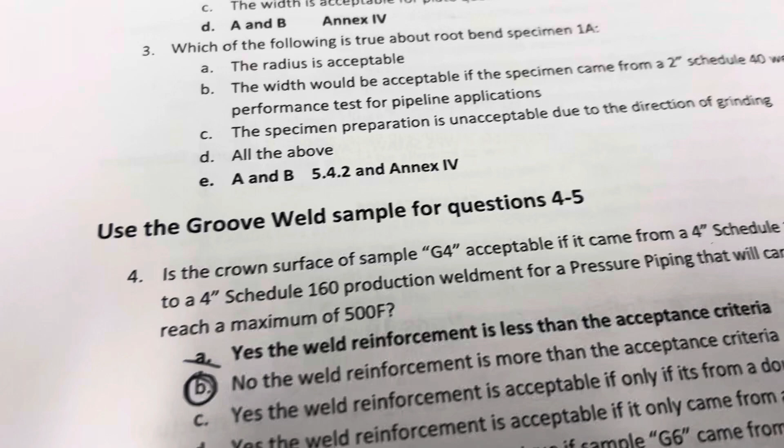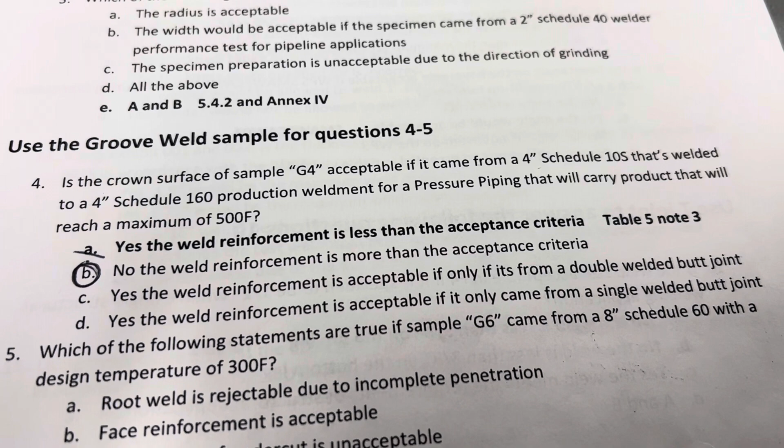Okay, we're gonna skip to number 4 because those are still in bend. 4 is groove weld. Is the crown surface of sample G4 acceptable if it came from a 4-inch Schedule 10S that's welded to a 4-inch Schedule 160 production weldment for a pressure piping that will carry product that will reach a maximum of 500 degrees Fahrenheit? So G4 groove, we know we're on this.

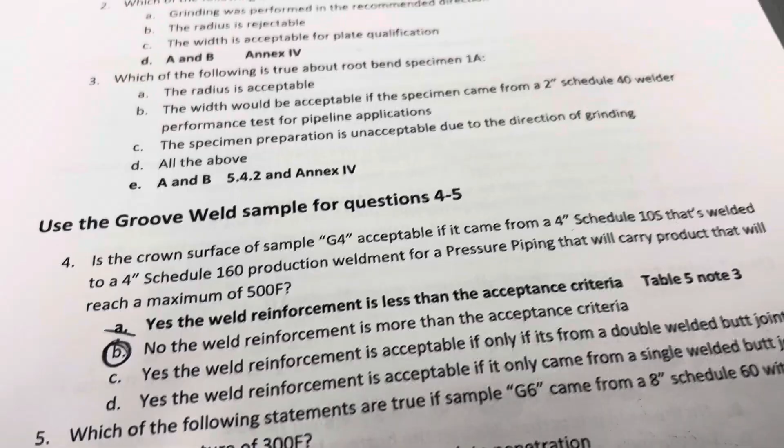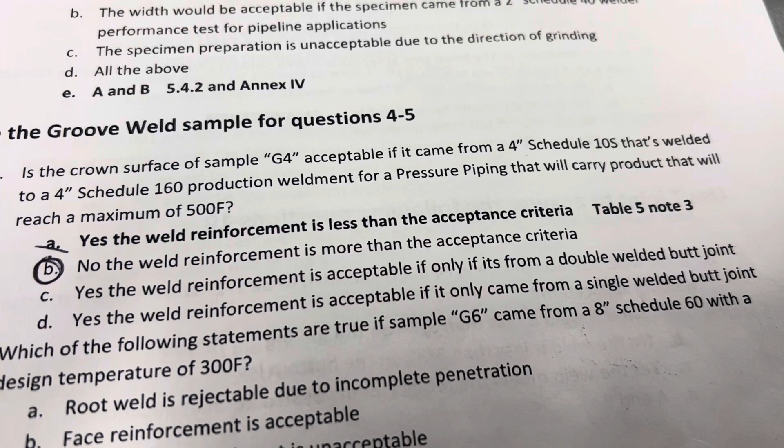Now let's look at our answers. Yes, the weld reinforcement is less than the acceptance criteria. No, the weld reinforcement is more than the acceptance criteria. Yes, the weld reinforcement is acceptable if it's from a double welded butt joint. Yes, the weld reinforcement is acceptable if it only came from a single welded butt joint.

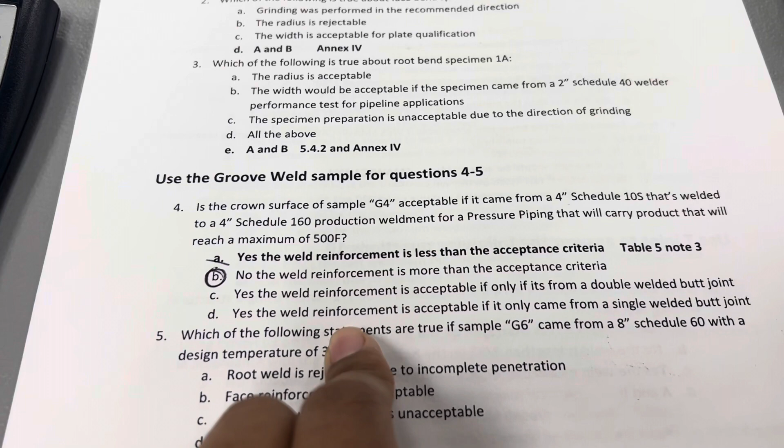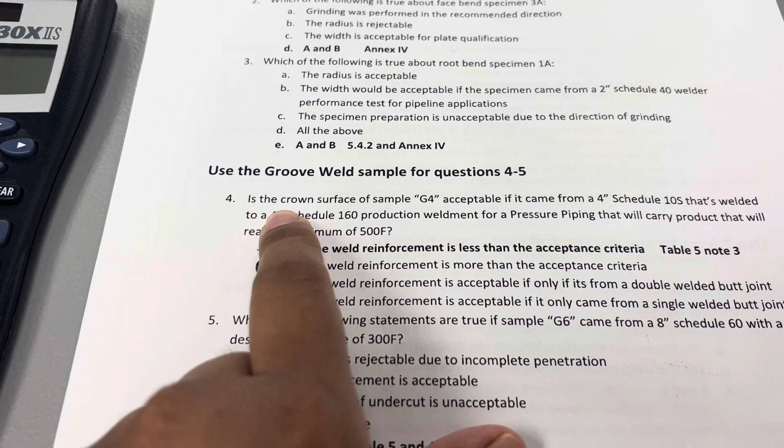So the answers are telling us we're going to look at weld reinforcement. Also the question, crown surface would indicate weld reinforcement. So it's also telling us we're going to go to pressure piping. Pressure piping is 4.0. Weld reinforcement is table 5. So we're in pressure piping, weld reinforcement. Okay, so it's telling us thickness of base metal.

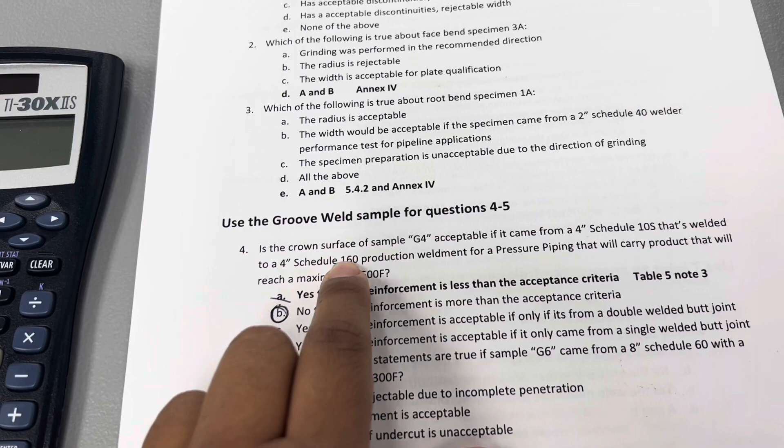Our question gives us 4-inch Schedule 10S, 4-inch Schedule 160. So that's diameter, because that's a pipe. That's the diameter of pipe. We need to know what the wall thickness is. So we know we have to go to pipe schedules. And you should know by now that that's on page 47.

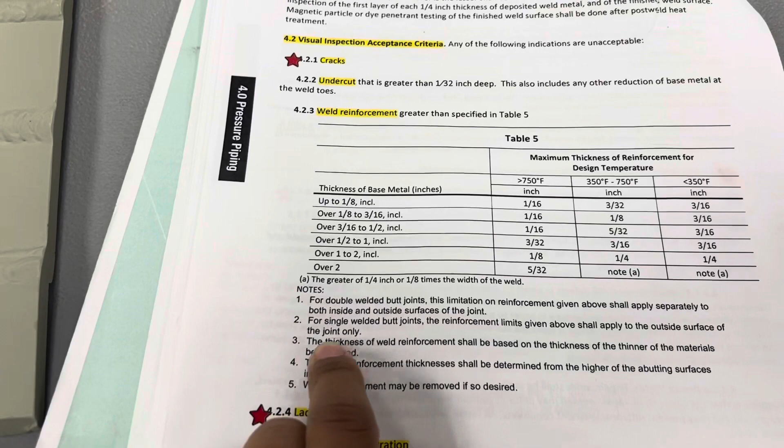4-inch Schedule 10 is 0.120, and there's 160. That's 0.530. But we should know that we don't even have to go to this one. We should just stop here because we need the smaller one. And that rule is stated on table 5. So when you're looking at table 5, the thickness of the weld reinforcement shall be based on the thickness of the thinner of the materials being joined.

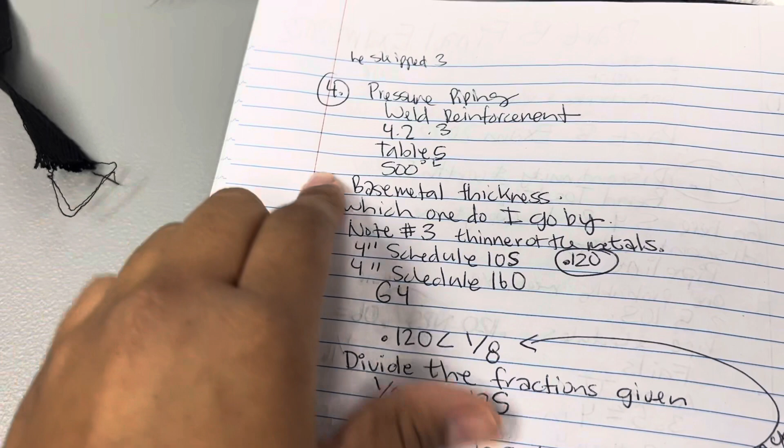So we went to pressure piping, weld reinforcement, table 5, base metal thickness. Which one do I go by? Note 3 says thinner of the metals. For these two, this one's the thinner one. That's why the 10 schedule is smaller, 0.120. So we're going to go back to table 5 because our question also gave us a degree.

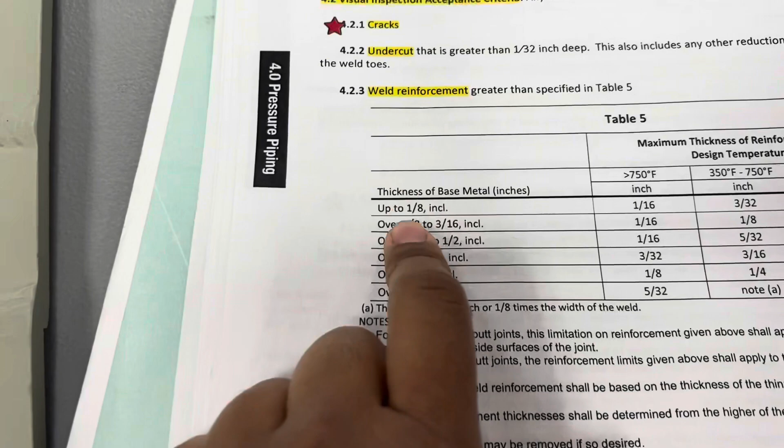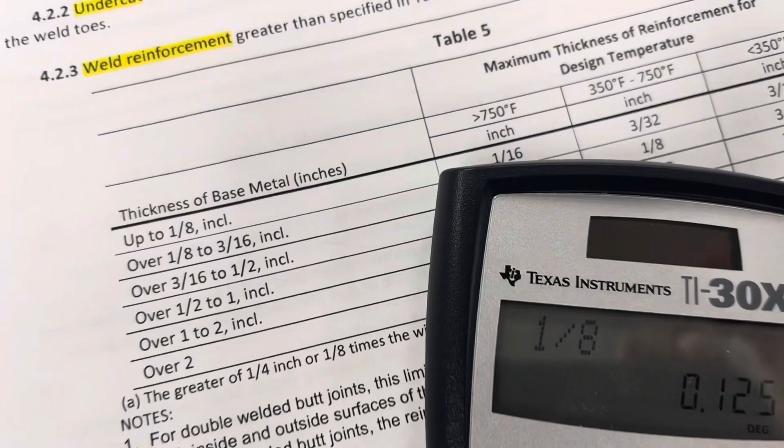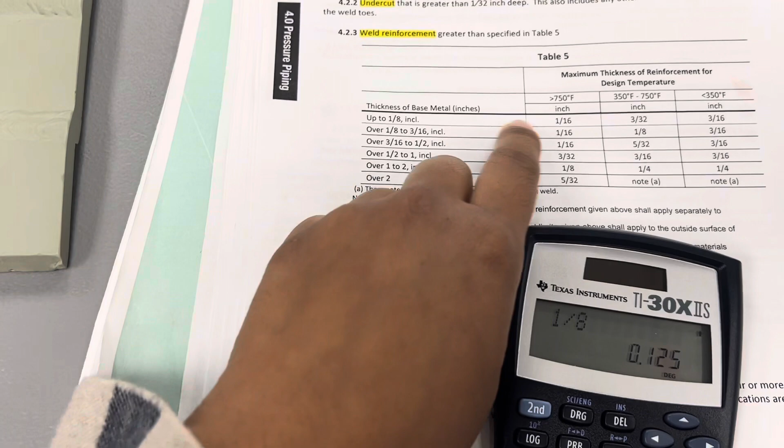So 0.120, where would it fall here? Let's do 1 divided by 8, right, if we don't know. 1 divided by 8 equals 0.125, and ours is 0.120, so we're right under 1/8. And the question gave us 500, so 3/32. So we're gonna get our V-WAC gauge, because for V-WAC we measure undercut, weld reinforcement.

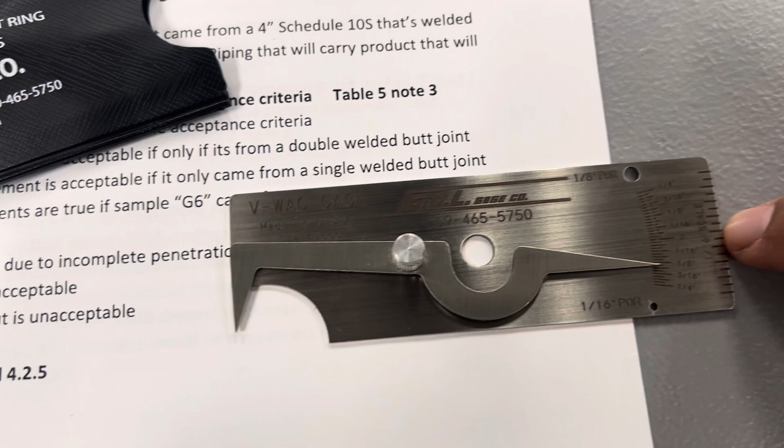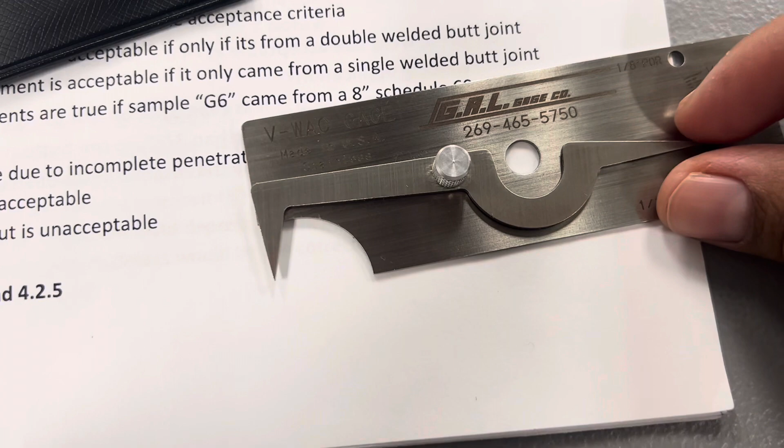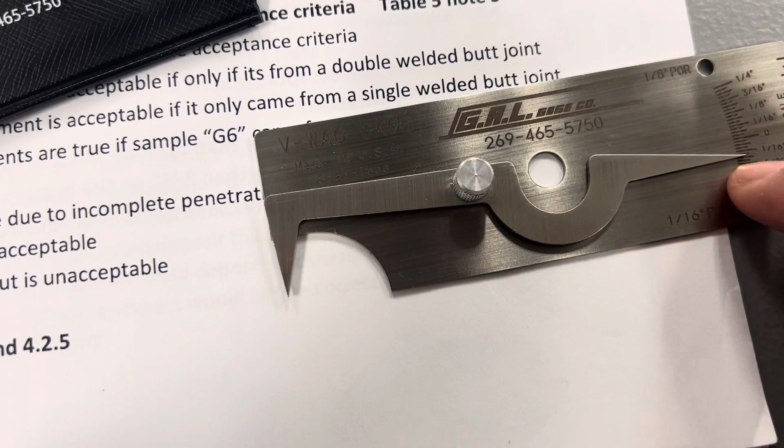Okay, 3/32. Let's see if I can do this. Weld reinforcement. So if I know this is the 0 line, 1, 2, 3. So we're going to be more or less across this little line, right up in there, because 1/8 is 4/32, so we're above 1/8. So 0, 1, 2, 3. Okay, so we're at 3/32 because this told us 3/32 is our maximum thickness reinforcement based off the size of the thinnest metal.

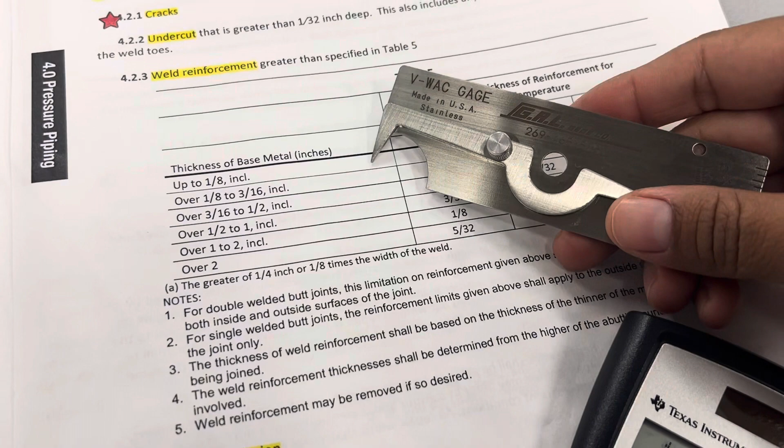So it's telling us to go to G4. So that's 1, 2, 3, 4. From what I'm seeing, it's way over my 3/32. Way over. So, gauge, and the answer is, so this was a typo. It says yes, the weld reinforcement is less than the acceptance criteria. It's actually no, the weld reinforcement is more than the acceptance criteria.